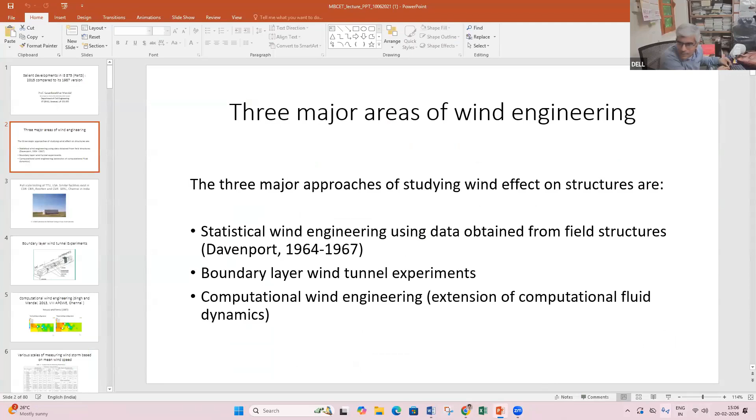Perfect. So I am happy to be with you all, especially the southern part of my own motherland. As we know, I used to teach human values for 10 years. Here also it's become a very popular course. About 185 students out of 600 BTech students used to opt for this course, Ethics, Philosophy and Values. I am a student of Ramakrishna Mission, from Purulia and Narendrapur. Then I went to Jadavpur University. So my dean and director gave the charge of teaching values, although practicing is more important and difficult also. Especially we must try to imbibe Indian values.

So to start with this topic, when we were very young, we were told that Sri Hanumanji used to fly himself. I asked the person who narrated the Ramayan, my Tauji, not by blood relation, but an elder brother whom my father used to call so, so we used to call him Tauji. I asked him, so there are certain stages of flying. He said that one can fly using, say, Pavan Putra Hanuman. So wind engineering is related to that a little. So in the beginning, we bow down to the deity, and with the steps you can reach that level, and then we can also fly.

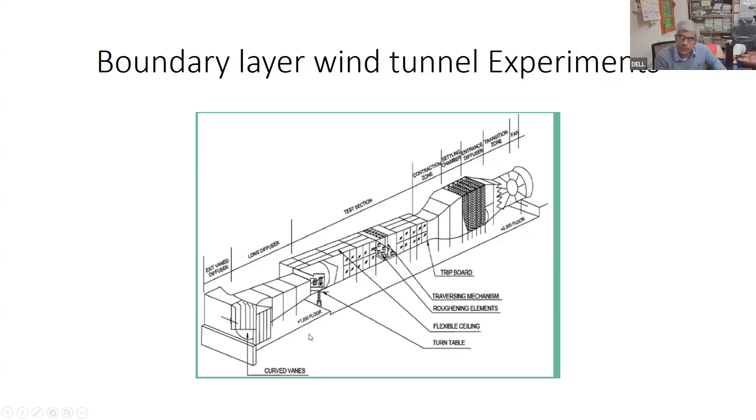So you could see this is a full-scale testing facility at TTU, Texas Tech University. And also we have similar, as I told, in CBRI and SERC, Chennai. Then a boundary layer wind tunnel can be open-ended like this. In one end, we have a fan and the other way it exits the air. Otherwise, we could have a closed circuit boundary layer wind tunnel where the whole air will be flowing in a closed duct, 4 ducts, you may say, like a rectangle.

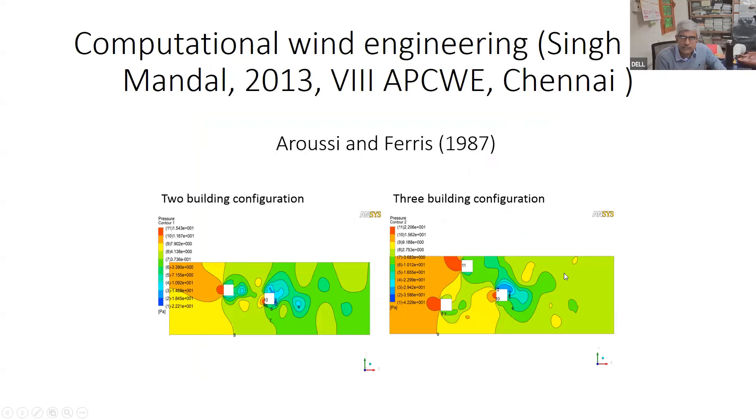So as I told, that 1987 paper helped us. So we took these 2 building and 3 building models and simulated those, got some good results and published in Chennai. So now go to the code really, probably. Let us see.

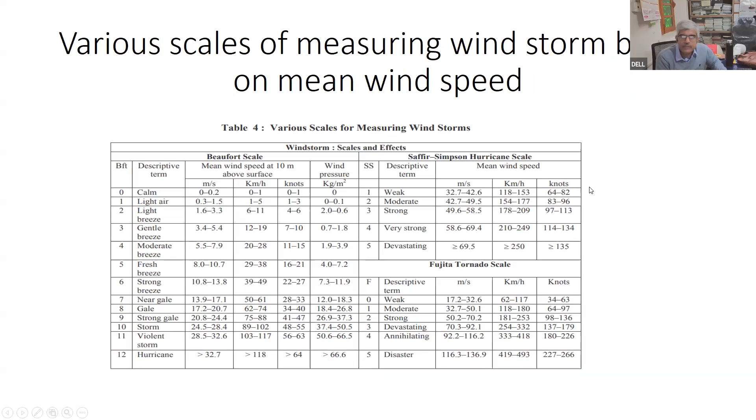Okay. So first, you should see that in our code, we are providing basic wind speed, design wind speed. So this wind speed comes from different scales and their effects. Like you see, Beaufort scale, Saffir-Simpson hurricane scale, Fujita tornado scale. So we get different types of scales and different types of wind speeds. Basic wind speed has a special definition that it is taken at 10 meter height and so on, based on the category effect.

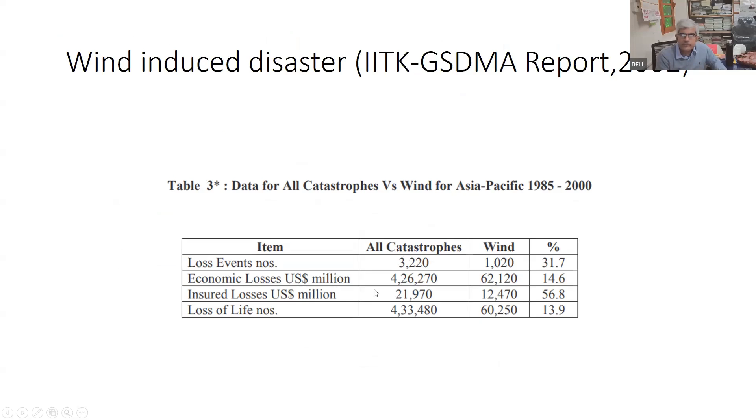So again, wind-induced disaster in that report I told in the beginning, that's the report of IIT Kanpur funded by Gujarat State Disaster Management Authority. And these are the casualties in wind loss events like this. I go to these changes now.

So here you will see aerodynamic roughness heights for individual terrain categories have been explicitly included and are used to derive turbulence intensity and mean hourly wind speed profiles. So we have got explicit equations now, almost. Earlier it was only data. Aerodynamic roughness we can now calculate. The previous classification of structures into B and C classes has been deleted. Only a single class has been provided in the new code. Earlier code had 3 classes, A, B, C.

And for K2 also there were two tables, one for peak wind approach and later on for mean wind approach. So now K2 factor has been combined to only 1 table. The earlier code had 2 tables for K2. One for peak wind approach where we take the averaging time of 3 seconds. The other one was the hourly mean wind speed, also known as mean wind approach, which is part of the gust factor method. So one table has been deleted now.

And additional modification factors like importance factors have been included, in terms of cyclonic modification factor for coastal areas up to 60 km from the coastal boundary of the country. Okay. Then also we have now simple, okay.

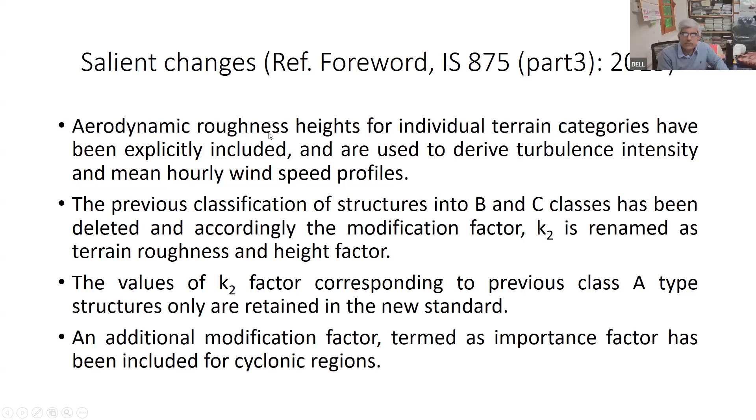Simple empirical expressions have been suggested for height variations of hourly mean wind speed and also turbulence intensity. While doing my PhD, when we had the last code, we didn't have any equation for turbulence intensity, which is very important. Now these equations have been given in the new code. Also the directionality effect and area averaging effect; the directionality effect takes care of the direction of the wind.

What is the area averaging factor? Suppose we were doing a thesis on local pressure coefficients and global pressure coefficients. If we take a pressure value which is for a small building, then it will be a bit high when the same pressure value is applied to a very wide building whose base dimensions are very large, say 30 meter by 35 meter. In normal buildings it's lower, but suppose we are designing a building which has a 35 meter face. In that case, if we take that higher value of wind pressure, we will be on the uneconomical side.

So we now have a factor, the area averaging factor, depending upon the area of the frontal face, where wind is considered as acting normal to that face. Guidelines to account for wind-induced interference for tall buildings or low rise buildings have also been included in this new code. This is important. Interference factor: because of heavy urbanization, we have one tower, the next tower, the third tower, and so many towers at one place.

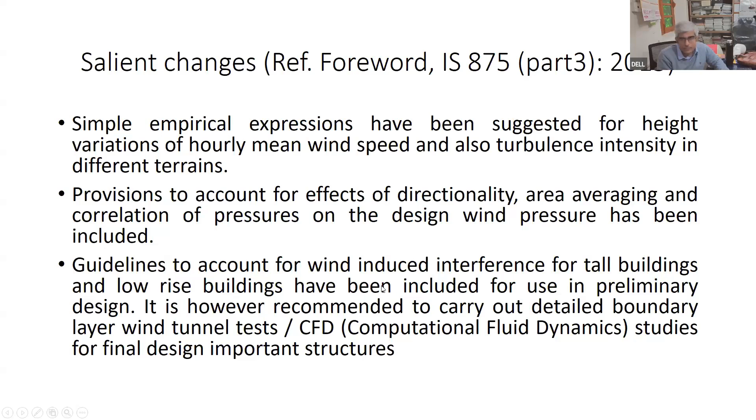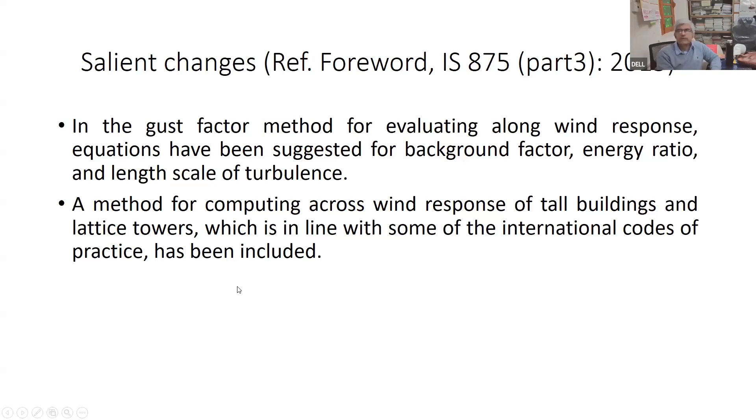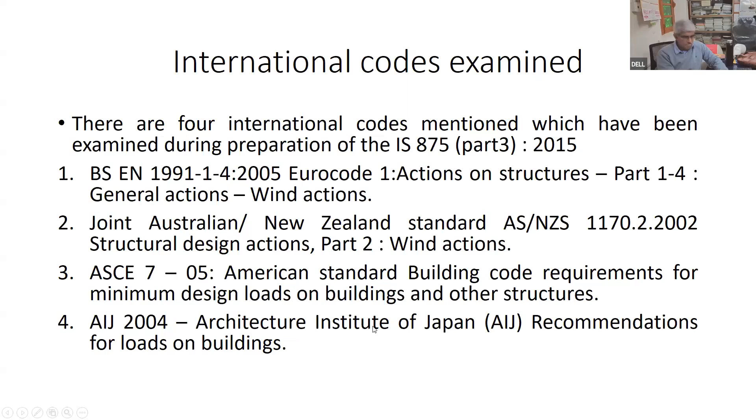So what are the different codes that have been taken care of in the new code? They are BS code 1991, 2005, but some of these codes have also been revised now, so we have to keep pace with all this. The last one is the Japanese code. Okay. Now let us see some of these parameters.

The first parameter is aerodynamic roughness height for terrain category. It is now given like this, very easy to remember. For category 1, where there are very small buildings of less than or equal to 10 meter, it is 0.002, and the values increase in the order of 10 times. Simple empirical expressions have also been suggested for variation of hourly mean wind speed and turbulence intensity. As an approximation, the roughness length is approximately 1/10 of the height of the surface roughness elements.

How do we define aerodynamic roughness? It is a parameter of some vertical wind profile equations that model the horizontal mean wind speed near ground. In the log wind profile, it is equivalent to the height at which the wind speed theoretically becomes 0 in the absence of wind slowing obstacles. It is so named because it is typically related to the height of terrain roughness elements, that is, protrusions from and/or depressions into the surface.

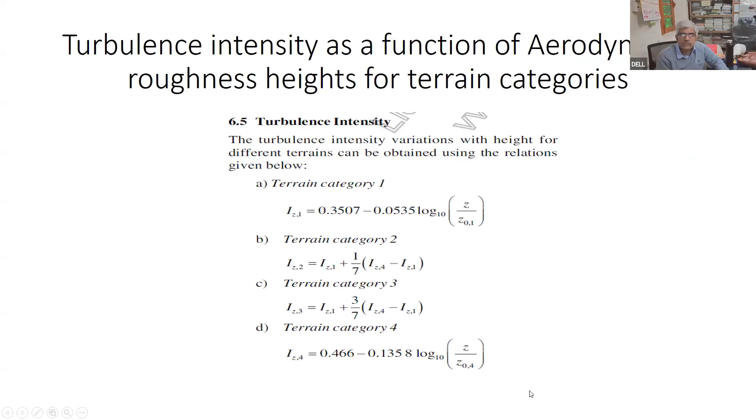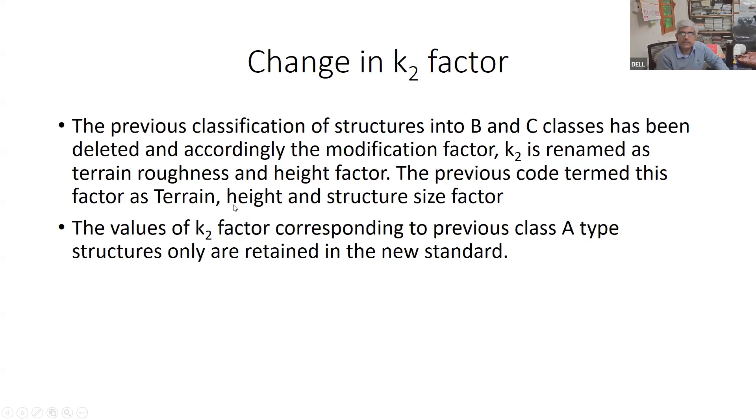Okay, so this type of I got it from somewhere. So these are the equations, turbulence intensity equations given in the code. Earlier it was not there, now we have. Similarly, K2 has been expressed in terms of this type of equations. Okay, so K2 is renamed as terrain roughness and height factor. The previous code termed this factor as terrain height and structure size factor.

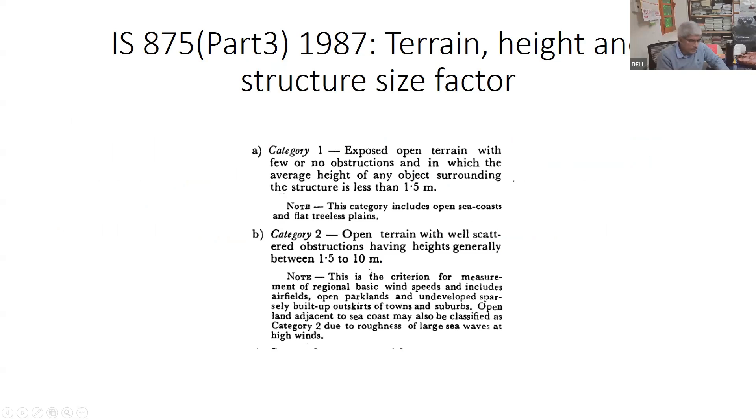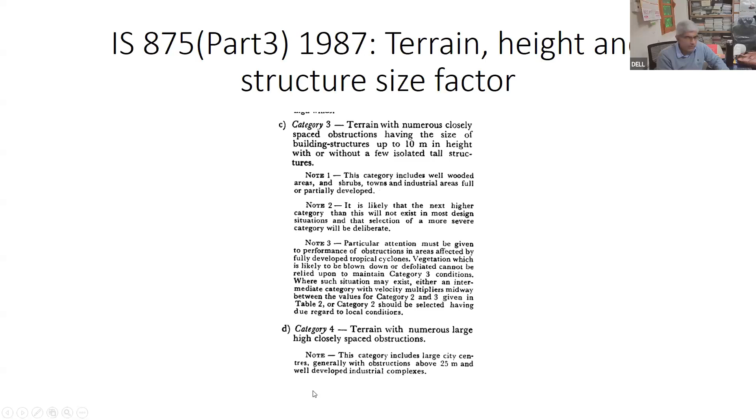Okay, now what is category 1? I told category 1 as 10 meter, but category 1 is where obstruction is 1.5, and category 2 where obstruction height is 1.5 to 10 meter. Category 3 up to 10 meters with some isolated tall structures, and category 4 where city like central business districts where height of structure is above 25 meter and having industrial complexes like tall buildings, you may say. Now, category definition, the new code says like this. So you can go through the codes and see this. I am moving ahead with this.

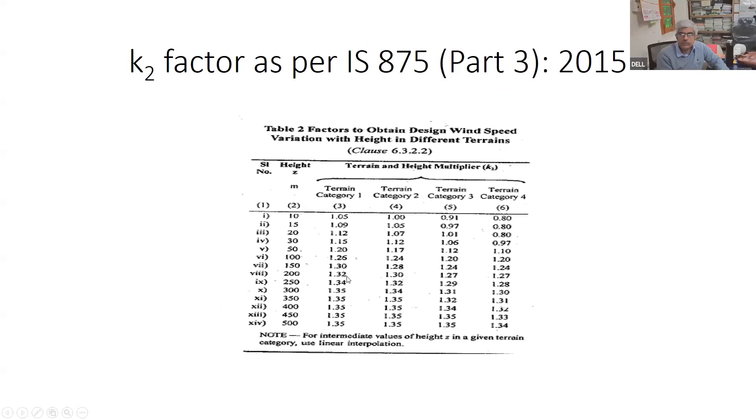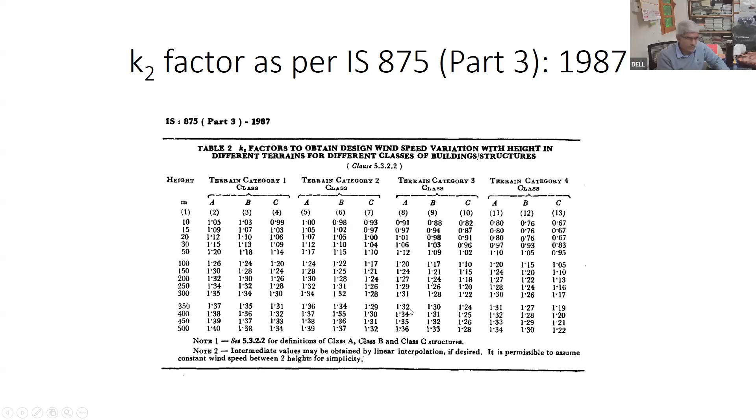Now, earlier code, we had A, B, C. Now the present code has only A, or it's not mentioning whether A or not. But these values are close to, if you see the last line, close to A. That's why I was telling A. Or in the beginning of the code, it's written that class A is written, others have been deleted. Okay. So K2 is the major modification here. And if you compare these values, very slight difference. Instead of 1.4, now it is 1.35. So K2 values have been just reduced marginally.

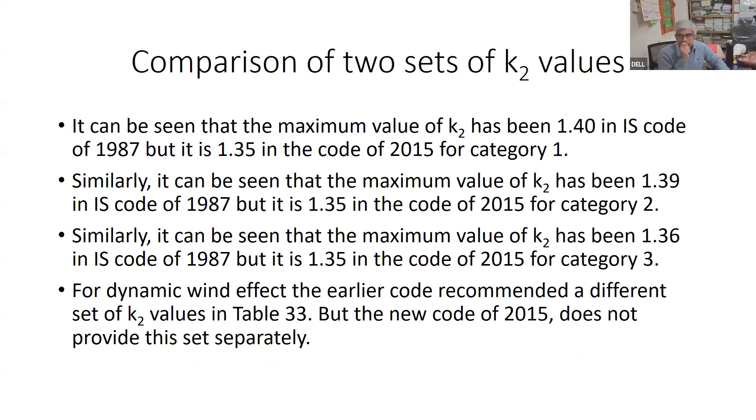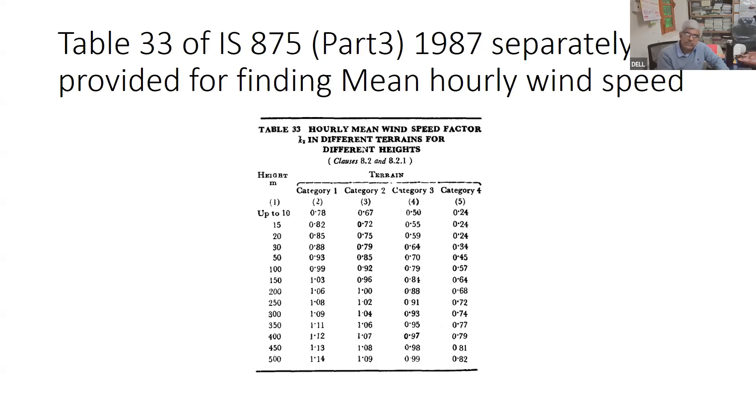Now table 33 provided in earlier code was like this, which has been deleted now because of refinement in the provisions in this mean wind approach. So that we'll see later.

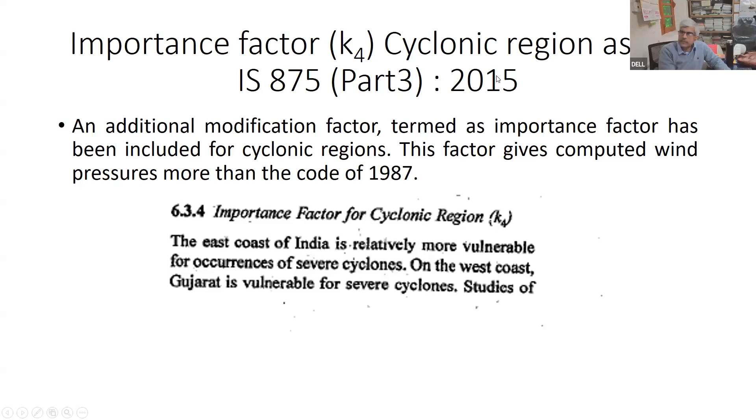So if you are interested, or while designing such buildings in cyclonic region, kindly go through the codes published by CED 57. In one code, we have dealt with this K4. We have published 5-6 codes. So I was telling it's 1.3, so when we do square of it, 0.6 Vz square. This is the code 15498. So kindly go through this code for further reading. This code was basically developed by the project done by IIT BHU, Professor Arnab Sarkar, and I was also in that team. Through a PhD, we did it.

So now, let's see. K4, how to define 80 kilometer, 60 kilometer. Cyclonic storms generally extend up to about 60 kilometer inland. The earlier one, if you see, is also 60 kilometer. I told 80 kilometer. Normally, we should go up to 80 kilometer.

And one thing I'll tell you, I have seen being a student from the village, when our Andhra coast is hit by any cyclone, Varanasi feels it within 1.5 day, maybe 2 nights max. So that wind speed is about like that only. That can be interesting to observe. I follow the Indian meteorological data and forecasting through All India Radio. Whenever there is any cyclone, I try to see when it is coming to Varanasi after hitting the east coast of India, my motherland. So it's interesting to see how much it travels, how much time it takes to travel, how many hours.

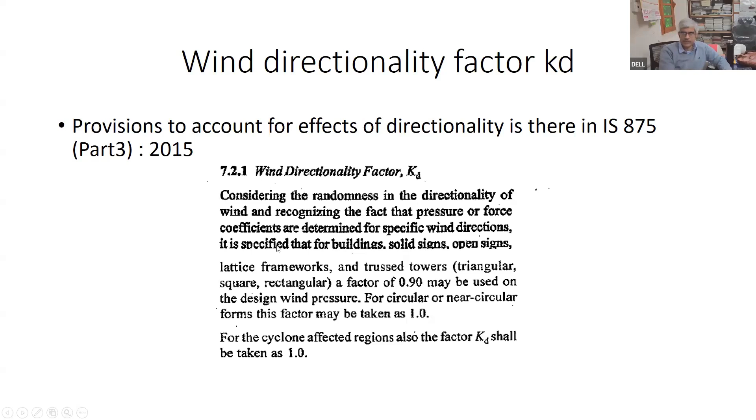Considering the randomness in the directionality of wind, and recognizing the fact that pressure or force coefficients are determined for specific wind directions, it is specified that for buildings, solid signs, open signs, and so on, a factor of 0.9 may be used on the design wind pressure. As I told, because it is very random, for a sustained period of time this force cannot be constant. So we reduce it by this factor, the wind directionality factor.

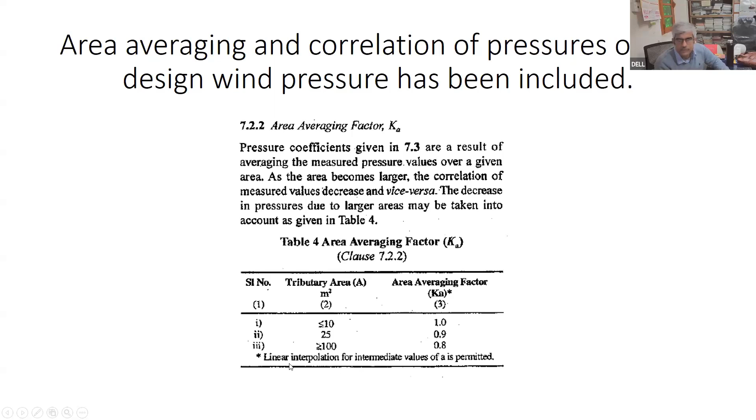Similarly, area averaging factor. As I told in the beginning, if your area is 10 meters square, it is 1. But if the area increases, then force will be equal to area multiplied by the design pressure. So if you multiply that much of area, it becomes a huge force. So we must reduce by some 10% or 20%. Linear interpolation for intermediate values is permitted. Is it okay? So this is known as area averaging factor.

Tributary area. So this is for local pressure and global pressure, overall structure and individual elements. One thesis we could do with a DAAD fellow on local pressures. One of my students went there as a DAAD fellow. He did it on local balconies. Suppose a multi-story building is having balconies all over its height. Then what will be the change in the design wind pressure? That has been done experimentally as well as statistically.

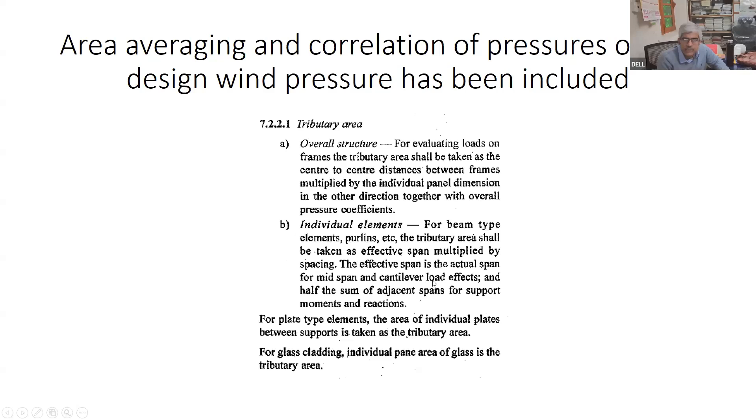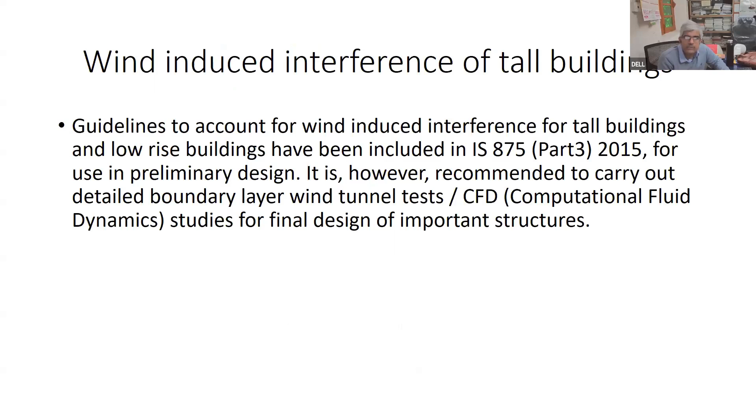So wind-induced interference, this is more interesting because the earlier code didn't provide for it. And this can be done using CFD also, as I told, Xie and Gu, and so many papers, AC Khanduri's paper. Many people have done it using CFD, now we call it CWE, computational wind engineering. So interference factors, same thing is written here. You can do it by wind tunnel test or CFD studies or both. It will be better to do by both. And then to account for the effect of interference, a wind interference factor has been introduced as a multiplying factor.

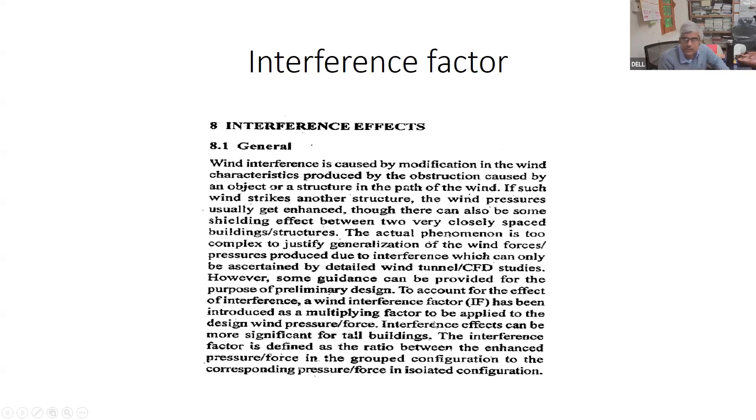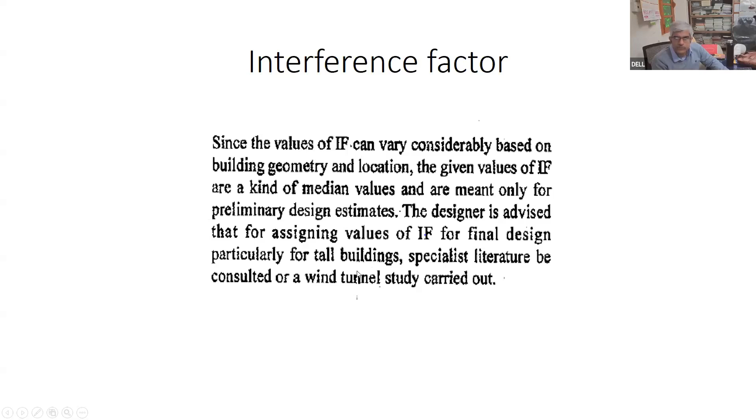Now, if you see the literature, this factor can be of different types. Sometimes we call it mean interference factor, sometimes envelope interference factor, and so on. Envelope means the higher one we take; mean, the average one we take. And since the values of interference can vary considerably based on building geometry and location, the given values of IF are a kind of median values meant only for preliminary design estimates. Otherwise, you have to go for specialist literature or wind tunnel study as told earlier. So these are some values.

Again, you see the interference factor, if you take it, the design wind pressure becomes 1.69 times. So probably you are getting an uneconomical building. 1.69 multiplied by 1.69, because if it is in the cyclonic zone, we will multiply twice. 1.69 means 1.7, so 1.7 multiplied by 1.7 is 2.89. So about 3 times the load is coming.

One of my classmates is a designer in the Mumbai region. His wind load was becoming 3 times, too much. So he asked what to do and how to optimize. In the beginning, when this code came in 2015-16, many questions used to come. So we have to go to specialist literature like Simiu and Scanlan, latest research papers, and accordingly optimize or bring it down suitably, or go for wind tunnel studies and prove that this is not 3 times.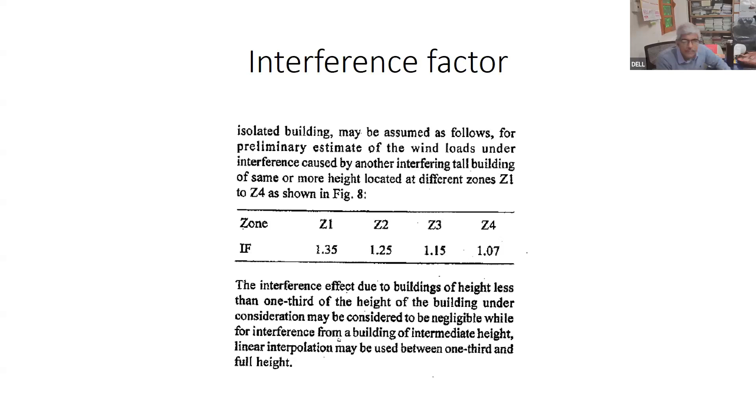This is lesser, about 1.5 times overall increase. So accordingly, we have to consult a lot of existing literature, or go for wind tunnel studies. Okay, so we get some glimpse that now this factor is to be taken care of.

X is the distance between the new building and old building, according to the positioning of the new building, say zone 4 on the downstream side or zone 4 on the upstream side. So see the distances carefully. On the upstream side, zone 4 is very far away from the existing building, whereas it is very close here. So it is very interesting to do some further studies, which we did through 3-4 MTech theses.

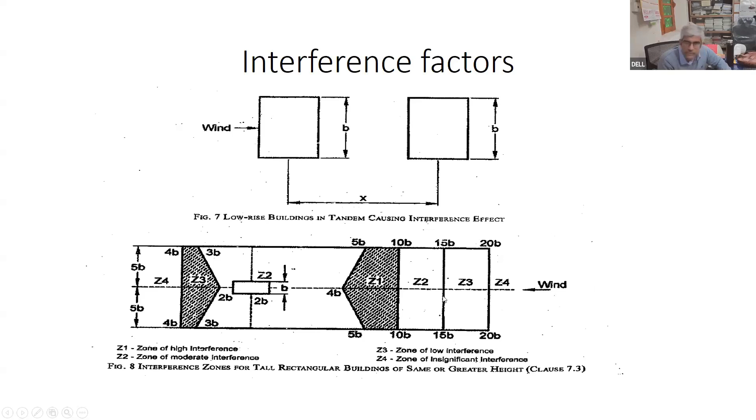Okay, so now the effect has been taken like I showed you in the beginning, one model. So ANSYS modeling we did through this MTech thesis, and this is the domain discretization, not finite element—it may be called meshing. Since it's ANSYS, we are using finite element only.

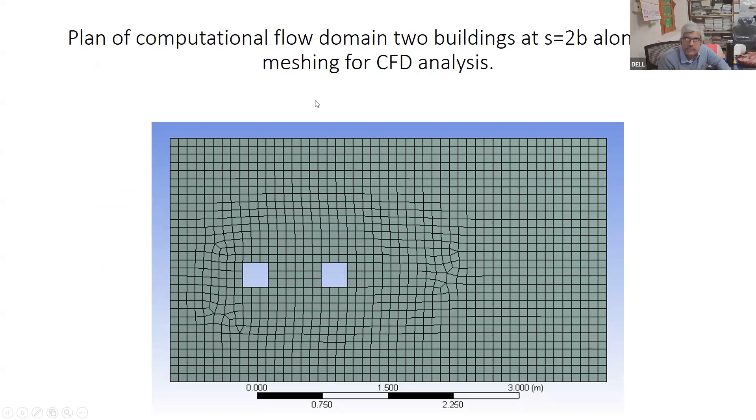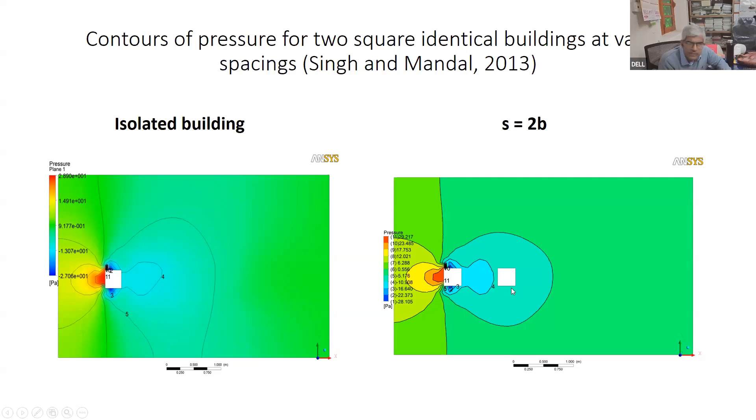So then we did isolated building flow around the isolated building and so on, and we placed the other building at the downstream or upstream. It's about 10 years back we did this study. Anyway, we could see that the pressure contours have changed to some extent, not drastically. Similarly, if we have 3 buildings and so on—these are quite interesting nowadays.

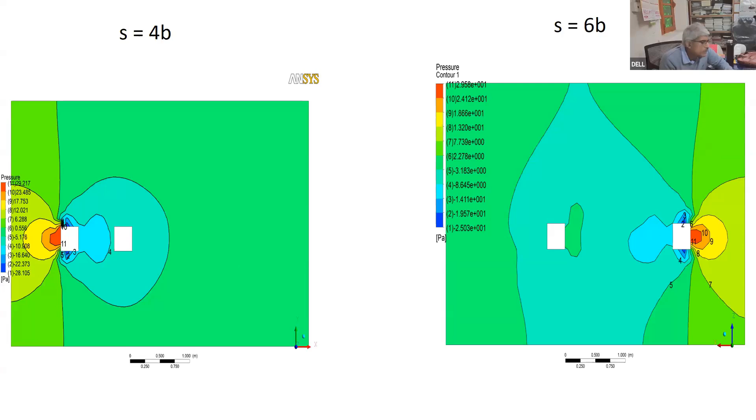Many experts are there in India. When I first started my computational engineering problem, I could see only IIT Kharagpur and IIT Chennai doing this type of research—Professor Aparasamy and Professor Ghosh of Aerospace Engineering did this type of CFD and experimentation. But now we have so many experts in India, really happy to note that.

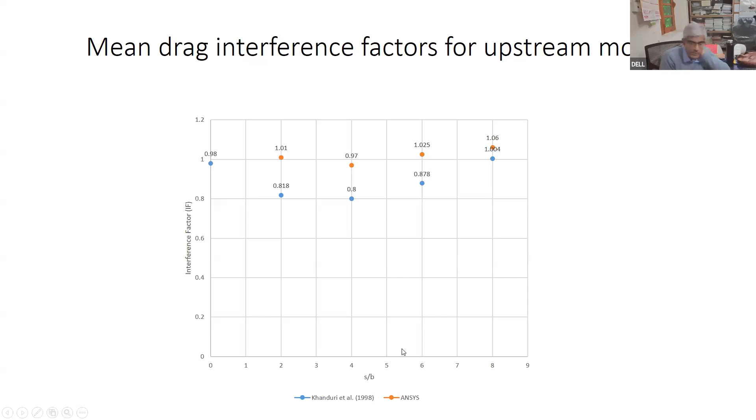Locating 2 new buildings around a square building, the value was coming 2 times, more than 2 times. So my seniors told me it's not possible—that was around 2015 and before that. But it is possible. So we have to be very careful, especially when we are going for multi-storied buildings; interference factor should be taken carefully.

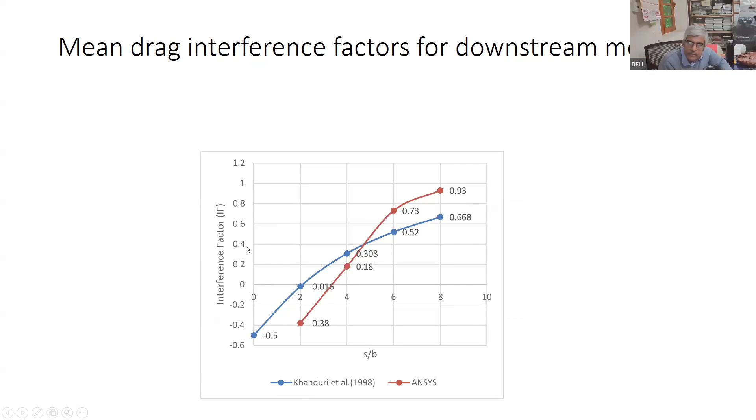So these are the simulations done by us using ANSYS, one of the MTech thesis. Again, our values and the Khanduri et al. values—our values are becoming lesser and higher depending on the s/b value. At certain places, it is crossing each other. Anyway, let's go forward again. This is a simulation.

Then these are the conclusions from that paper. Now, changes in the along wind response—this is very major nowadays. The earlier code gave us a lot of graphs, and we had to read values from those graphs. But the present code gives us numerical, empirical expressions. These can be easily programmed and you can find the actual value from those equations, instead of reading graphs, which cannot be so easily discretized or values have to be read manually. So now designers can use these formulas easily.

So what is the Gust factor? Gust factor is the method for evaluating along wind response or across wind response also. In the earlier code, this expression was given as 1 plus GF into roughness coefficient, where GF is the peak factor and B is the background factor, into 1 plus phi squared SE by beta. So the first part, B, is known as the background equivalent static wind load factor, also known as background factor or background ESWL. Along wind response or across wind response are also known as equivalent static wind load.

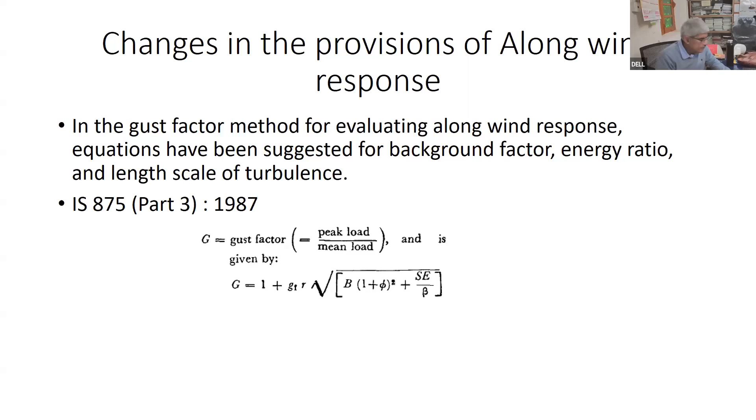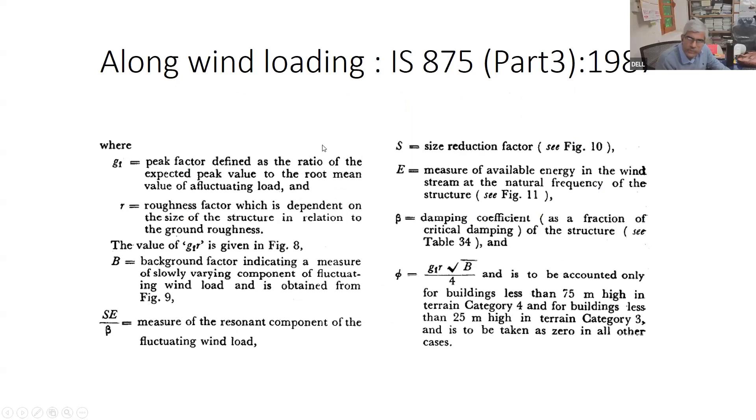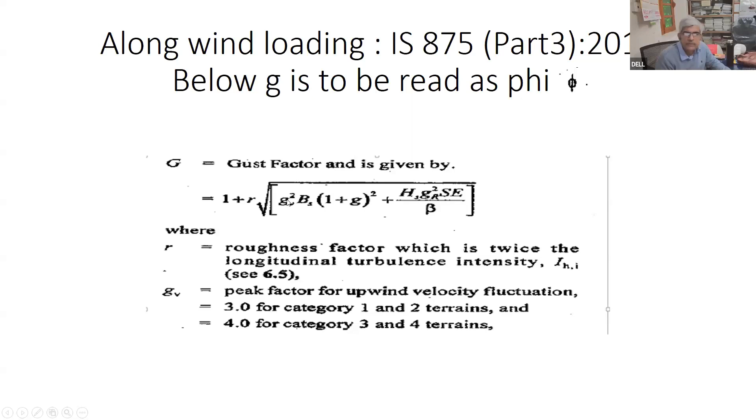See the new code - this is the new codal expression. It has been changed like this, some more factors have come in. GF, which was outside, is nothing but peak factor, which is now defined in terms of background component, and it's different - GV and GR. This is background component and this is resonant component. Background component means wind environmental scenario, velocity fluctuations, randomness in wind. That peak factor is known as GV, whereas GR is the peak factor for resonant responses.

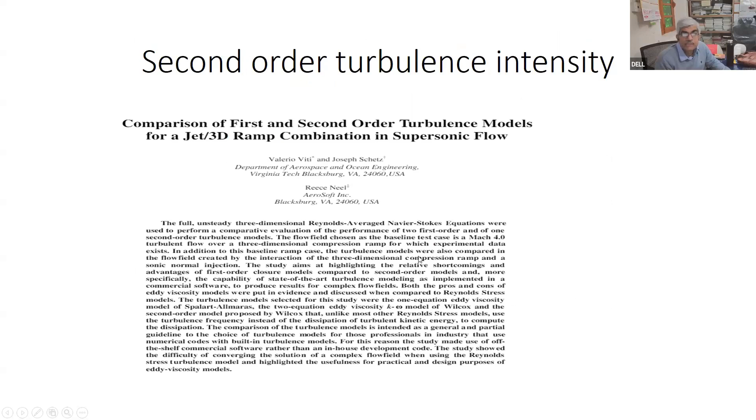So we now have so many expressions given. Earlier all were in figure form. Now there are so many - how the second order turbulence intensity affects these expressions can be researched, applying research on those expressions. Earlier we used to find graphs, now we use these expressions. Okay, see the graphs now.

LH, earlier we used to use this - this is turbulent length scale. A measure of turbulent length scale - you frequently see that in storms there are eddies, small eddies and bigger eddies. These bigger and smaller eddies have certain turbulence length scale. In terrain category 1, because there is minimum obstruction like sea coast, a very small isolated structure with only shrubs, buildings about 1.5 meter height with plants and trees - there the turbulent length scale will be very large, so possibility of getting LH higher. Whereas in cities it is quite low because turbulence cannot be generated amongst too many buildings. So LH is lesser, that's how you can understand it physically.

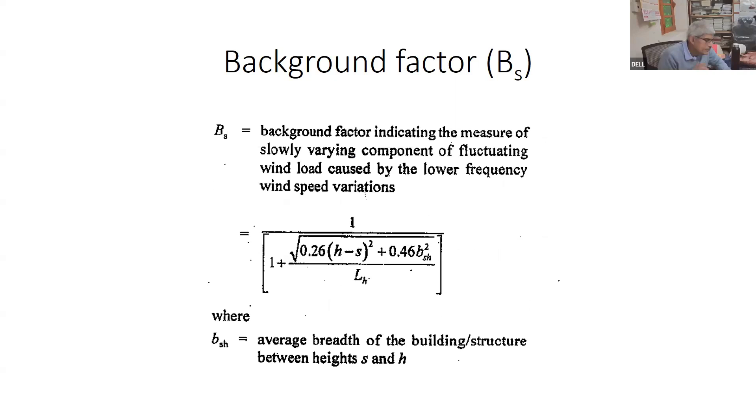Then background factor - now also we have these expressions. Just go through the code with a view only, on net also you can find it. This background factor earlier had a graph, but present code gives us these expressions. So do they match? Would you really get those curves using this one? This can be a study again - what is the error? This I was thinking while preparing these slides. What could be the error between that graph and these expressions - data from this expression versus this data. Is there any error and how does that affect the designer? This could be a good topic for PhD even.

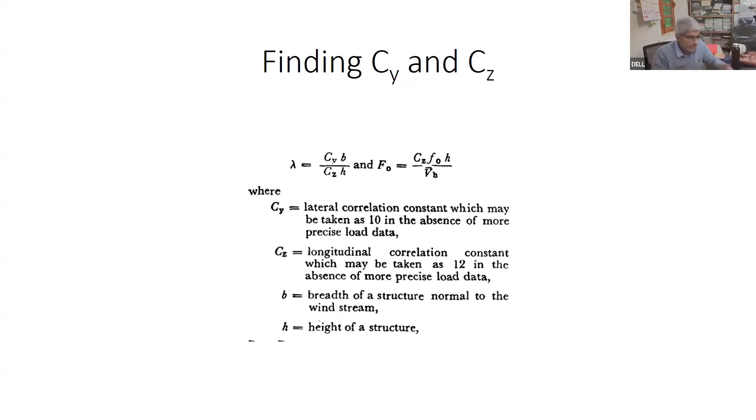So then we have CY, CZ, lateral correlation constants. We take 10 for this, 12 for that, but what are they? Lateral correlation constant - do you remember Reynolds stresses? Wind velocity has a mean component and also a fluctuating component, U dash. Because of fluctuations in the U dash direction and other directions, there will be some correlation. So if we take U dash V dash and average it, we get its Reynolds stress, multiplied by rho. So that means lateral correlation amongst these axes - two horizontal axes and one vertical axis - is taken care of by CY and CZ. I hope I could explain it a little bit.

And size reduction factor - now we have an expression like this. Earlier we had a graph like this. One thing is that the reduced frequency, which is the non-dimensional frequency - F naught into H, where F naught is frequency multiplied by height in meters, divided by VH, the velocity at the top of the building or structure. So we get a reduced frequency or dimensionless frequency on the x-axis, and based on that we get a size reduction factor. So what is this physically? Can you get it?

This requires some thinking and study. It depends on lambda as well as reduced frequency, the size reduction factor. It actually takes care of the structure size.

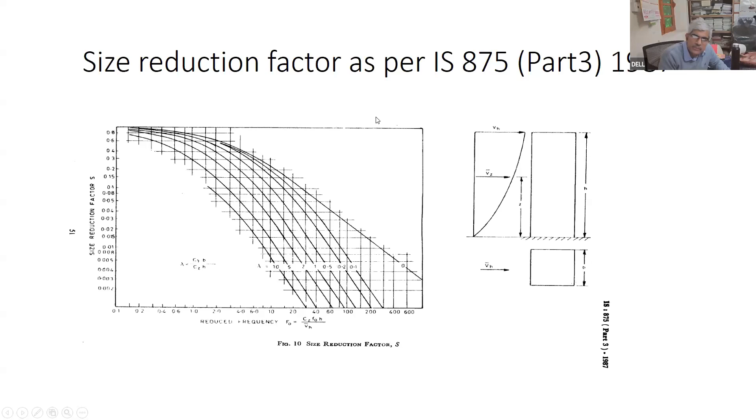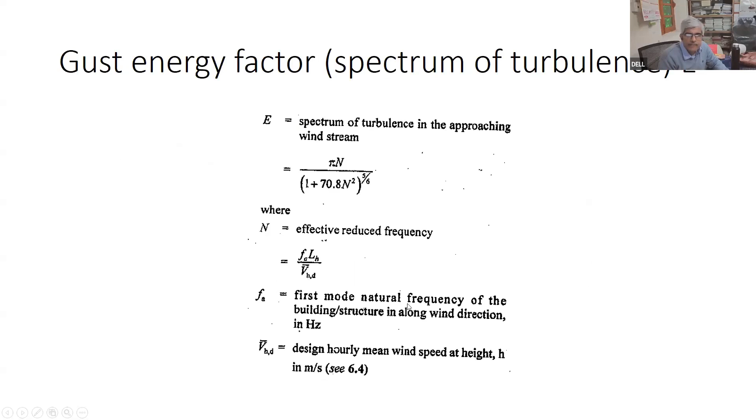E, the energy spectrum of turbulence, representing the energy content in the turbulence of the wind stream, is given by this expression. N is the effective reduced frequency, and using this expression we can find E, as the earlier code used to give. As the frequency increases, the energy decreases, but it's not just frequency, it's reduced frequency or effective reduced frequency.

The new code has also given a method for computing across-wind response of tall buildings. The acceleration has also been given in our code. Earlier, these were first proposed by Gu and Quan. Then we did some MTech thesis work, referenced by Patidar and others in several papers, and also one PhD on across-wind response.

We have seen that normally the dynamic effect of tall buildings needs to be taken care of when the total height of the building divided by any of the smaller dimensions is more than 5. This ratio, H by the smaller dimension, is also known as the aspect ratio. If it increases beyond 8, the across-wind load may be more than the along-wind load, and drastically higher.

Also, in 2007, it was noted during the Jinmao building investigation, before construction of such tall buildings, there is a paper, and a number of papers are there on that. It has been noted that square buildings are subjected to higher across-wind loading.

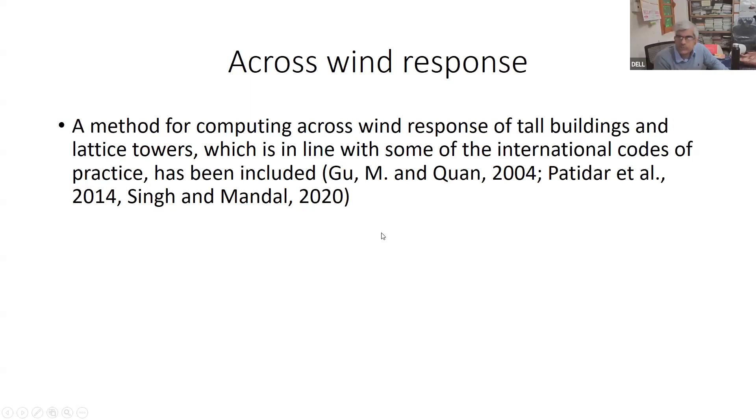But how is this generated for us? Is there any figure here? Let me just quickly check. Okay, the basic figure is not given here, so I'll take the help of this other figure instead.

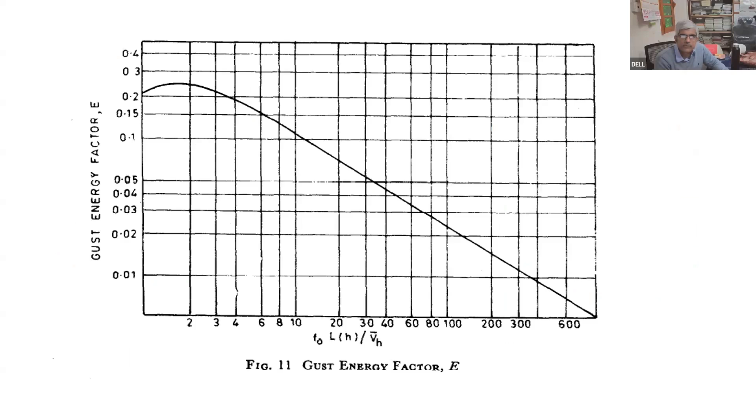Because of random vortex shedding, vortices and streamline separation will occur at this corner and the other corner, and it will hit the building itself if this side of the building is large. So the building will now vibrate in the direction perpendicular to the wind. Similarly, on the other side, if they get separated, this becomes a very random phenomenon, and at certain wind velocities, the building will start vibrating in the across-wind direction. This is known as across-wind response, and it is very critical for square sections.

That's why our code gives the case where B by D is 1:1. As I was saying, square buildings are subjected to higher across-wind response.

Now see these expressions. The base bending moment, that is the bending moment at the base of the tall building, MC, can be estimated using this formula, where GH is a peak factor, and PH is the design wind pressure. The hourly mean wind pressure is equal to 0.6 Vz square. Why 0.6? Because it's half into rho v square, and pressure or energy per unit volume.

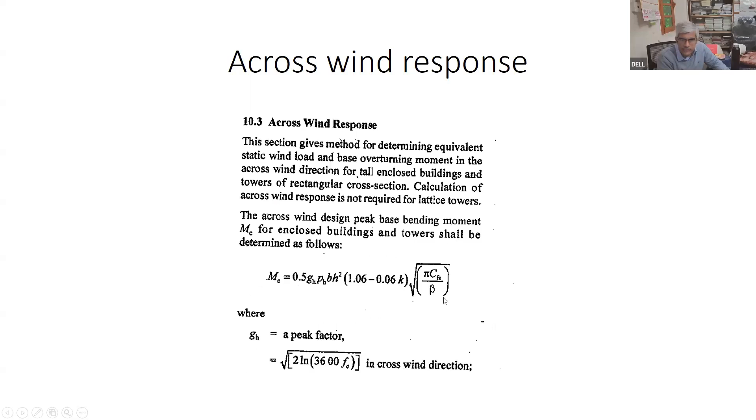And so here we have to do a little bit of study on this mode shape power exponent. In 2007, it was first noted by the researchers that this can play a bigger role, and we can get high base bending moment due to across wind. So MC, the design peak base bending moment due to across wind load, can be found out by this expression, where K and FC are there.

Okay, K, how to calculate K? A mode shape, this one is first mode and so on. Then we have used this FZ; the distribution of loads can be found out by putting MC here and so on. And FZC is the across wind load per unit height at height Z. So now we get a different expression for across wind loading also. And this expression is given in peak acceleration.

Normally, the inhabitants or users of the building should not feel very high acceleration, or it should not be beyond their tolerance limit. So we must calculate theoretically or ensure that the probable acceleration after construction is within the permissible limit. If you see Indian standard number 16700 for tall buildings, there you will see that certain permissible values for acceleration have been limited.

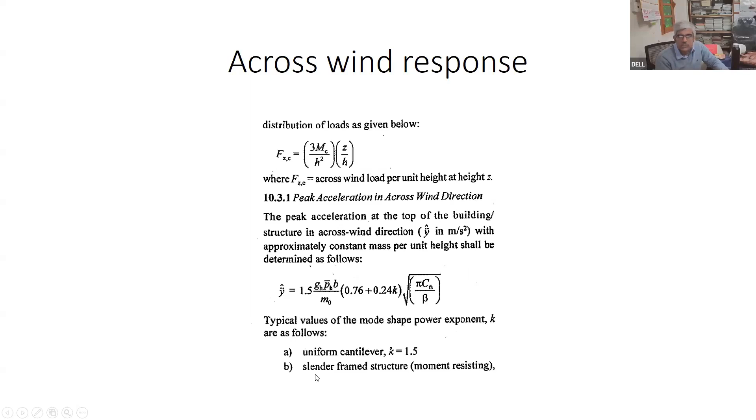And this permissible value is more in case of commercial buildings. Means residential buildings should not be subjected to certain values, which are lesser than for commercial buildings. Okay, so we can check using this formula whether acceleration is increasing beyond the permissible limit or not. So K values for different types of structures have been given here. Slender frame structure, moment resisting, K is equal to 0.5.

Again, can we justify why it is more in case of lattice tower, why it is 2.5, why it is 1.5 here for uniform cantilever, and for slender frame structure, moment resisting, it is reduced to 0.5? So we have to go into the detail of this formulation and find out why these values are changing. And these are the graphs again from the new code. These graphs have been prescribed in the new code itself. So go through it carefully.

So again, you see on the x-axis, we have a dimensionless factor. So whenever you do any good research or any new study, try to publish the results in dimensionless form. Then you can get more information which is hidden. So crosswind CFS, we were seeing in the last few slides. CFS variation has been given, or you can take from here. This is the crosswind force spectrum coefficient, which is taken to find out the crosswind loading.

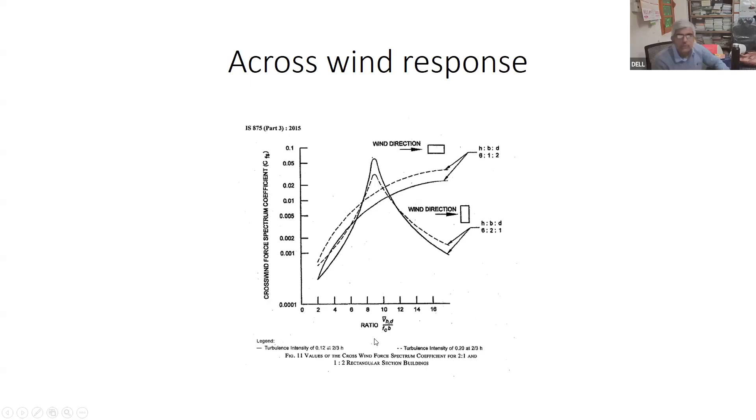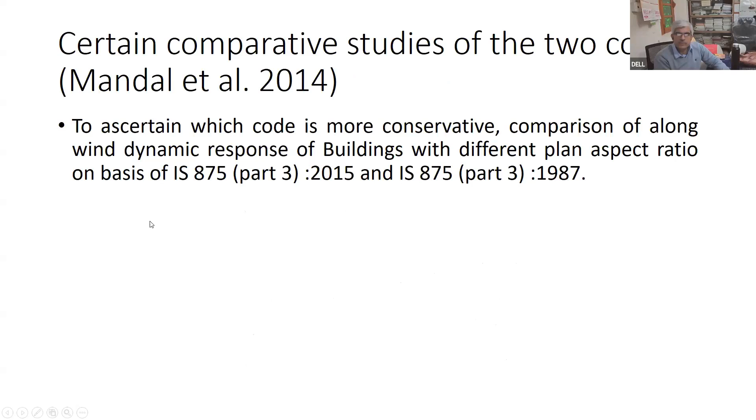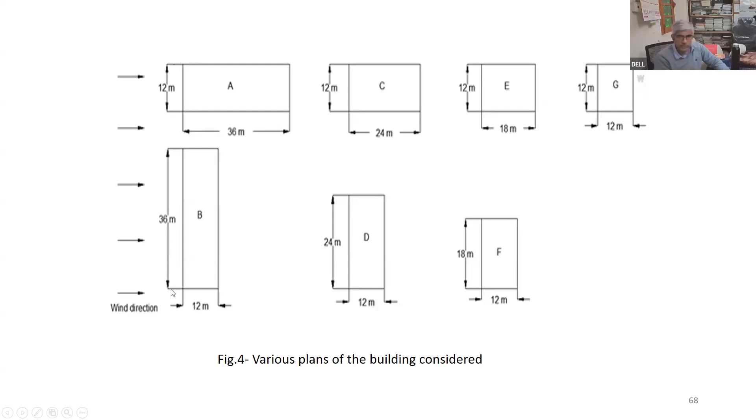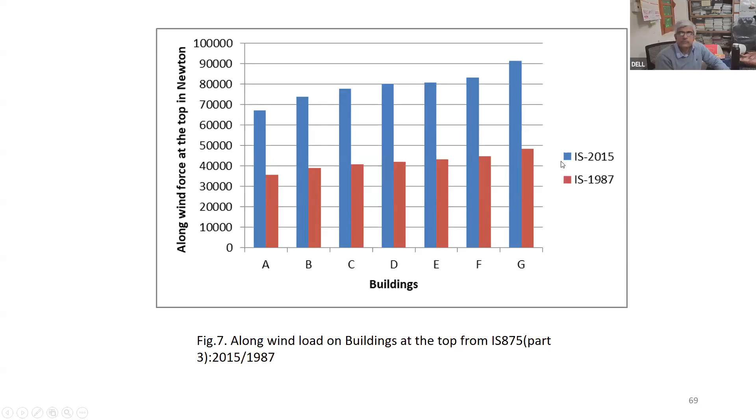in 2015 is more than 1987. Of course, we must tell whether the cyclonic region factor was taken or not, or that other factor 1 point. So normally 2015 is more conservative. It has been seen now. It depends on different parameters, of course. And you see 2015 is giving higher load than 87.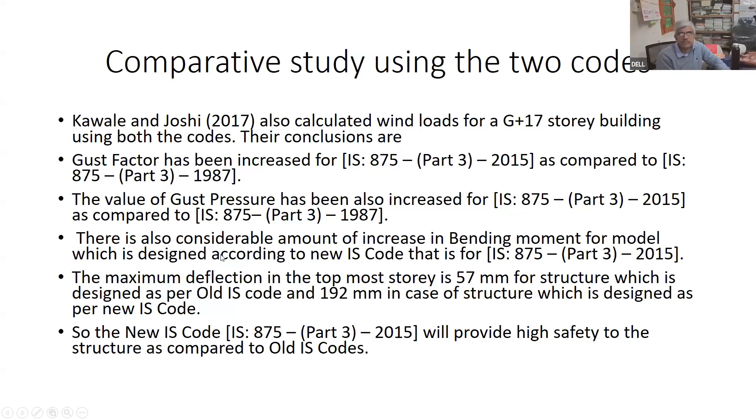There is also a considerable amount of increase in bending moment for models designed according to the new IS code. The maximum deflection in the topmost story is 57 millimeter for the structure designed as per the old code, and the new code gives 192. So these are the things. So our new code is more conservative, probably. So it depends. In general it is conservative. You can conclude based on our study also.

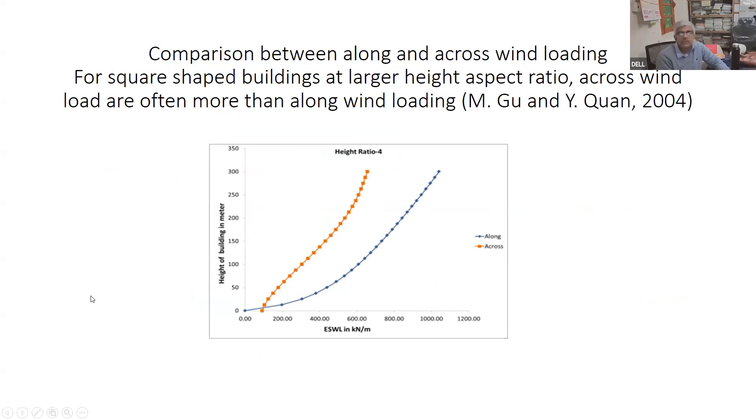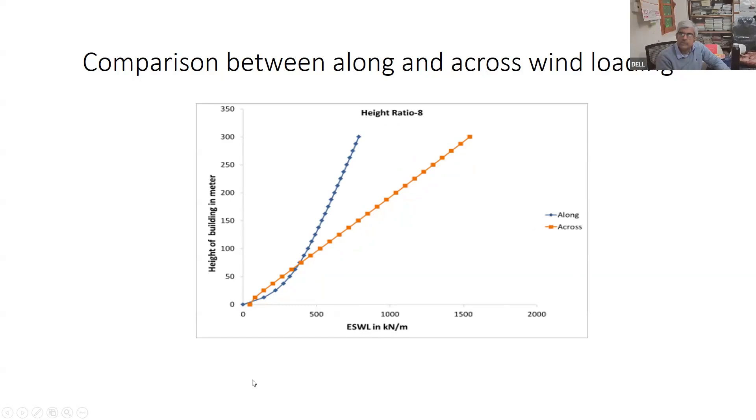And these are the references of APCWE, Asia Pacific Conference on Wind Engineering. In wind engineering, every year there is a conference. One national conference followed by an international conference like APCWE or ICWE, International Conference on Wind Engineering. Then again NCWE. So every 2 years we earlier had an NCWE. Now we are picking up. The last one was in Nagpur last year, November.

And this is the paper I was telling about, aspects of inlet boundary prescription. If you are interested, you can find this paper, how those 5 equations, one is the mass conservation equation, second and third are momentum equations, fourth and fifth are turbulence kinetic energy equations. All 5 were given all those experimental data from throughout the world. 10 data sets were very usable. So those were put in the equations.

Then all derivatives were calculated using the finite difference method and so on. Then for those equations, we saw what is the error from each equation, and those errors along the vertical we integrated. So we got a residual error index, and then we correlated that with the simulation results also.

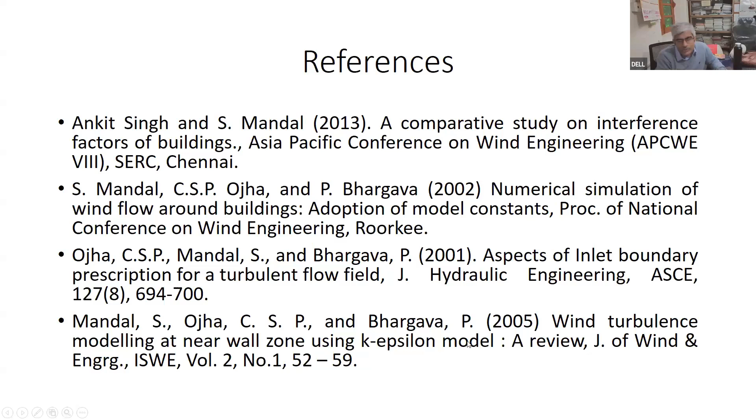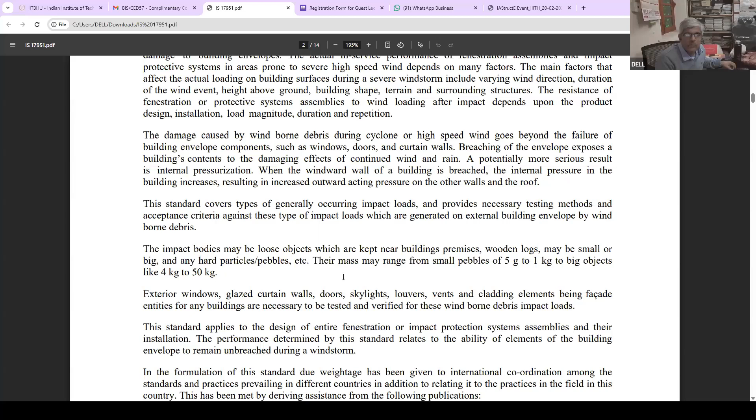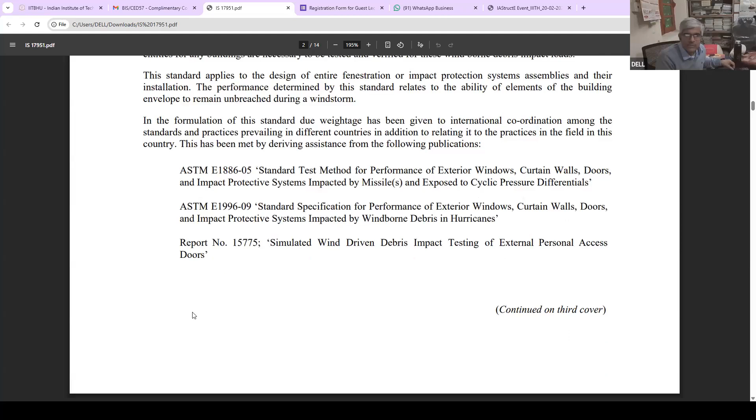Yeah. This one, yes. Okay, this is IS 17951, method for determination of performance relating to the safety of external building envelopes, also known as facades, impacted by wind-borne debris. So quickly, let us go through as you told. The debris weights can be from 1 kg to 4 kg, 50 kg, up to even more than that. Normally wherever there is a cyclone, debris has been very dangerous for the next building. So we had to consult many ASTM codes and reports, and these are very simple.

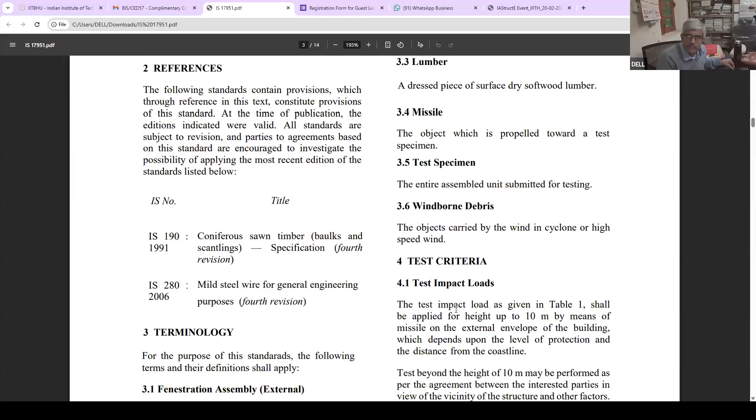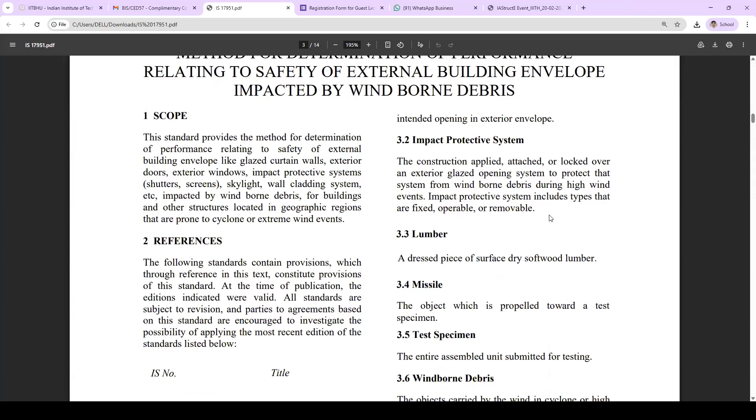We define missile, the object which is propelled towards a test specimen. How to test those facades? Some method has been given. Here you see fenestration assembly, the construction intended to be installed to fill. Okay. So I'll project it quickly, page down karke, let us see what is there.

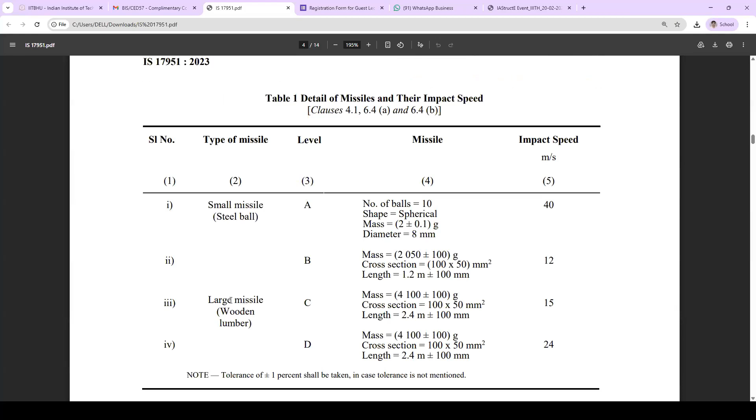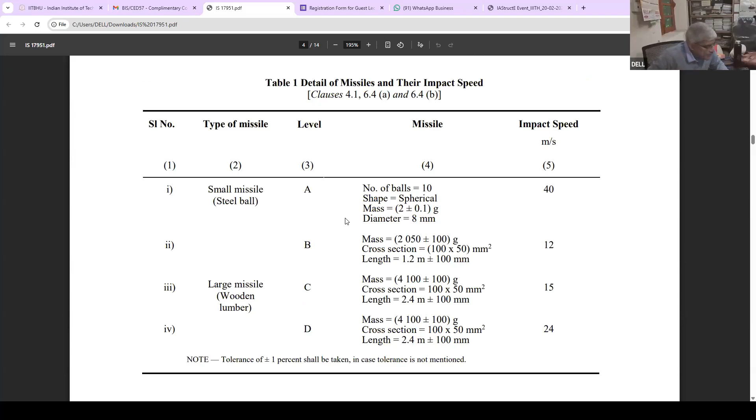Sir, this is for testing, I think. Whether for the wind load consideration also we need to take this code? Local pressure coefficients are given in IS 875 Part 3 for facades. But for impact, you will get some idea how to take care of those impacts for the facades due to debris. Okay, sir. Thank you.

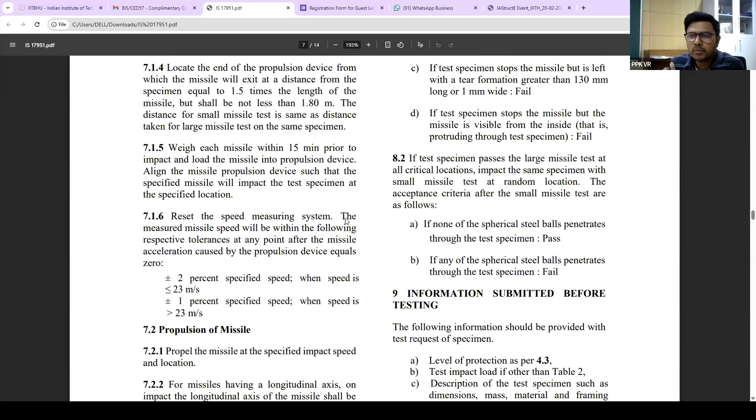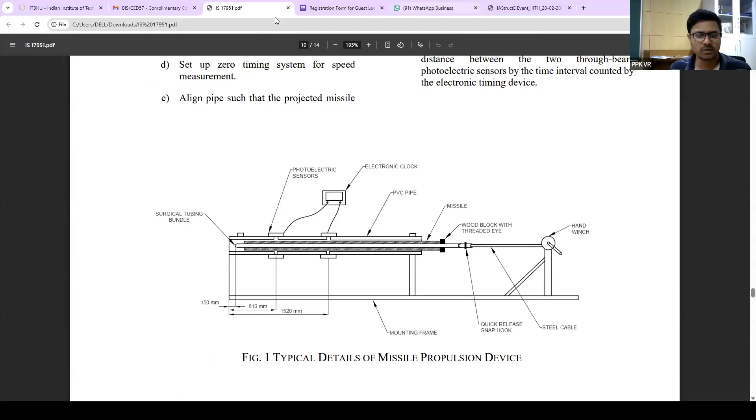Thank you, Mr. Raghupati. Sir, you can unshare the screen. Okay, just 1 minute. You wanted to show something? No, see, these are the tests, how to do. This is the details of that missile propulsion test device and test. Okay, unshare. Yes. The next question is slightly lengthy.

The question is related to how to decide the geometrical scale and velocity scale, especially in the wind tunnel. Let's say there is a 100-meter building coming up in an urban area where the basic wind speed is up to 50 meters per second, and it is to be designed for wind loads. How is the geometrical length scale and velocity scale decided for wind tunnel testing, making sure that the scaled model results translate well to the prototype building?

Frankly speaking, I should refer this question to my seniors who had done experimental work. I didn't do experimental work, but there are some theorems like Buckingham's pi theorem for modeling, like for masonry buildings subjected to earthquake we use Buckingham's pi theorem. Similarly, there are some scaling laws. If you go through Davenport's work or any published work, a lot of guidelines are given in Davenport's book or published papers. I have not done this actually. No problem. Okay, thank you.